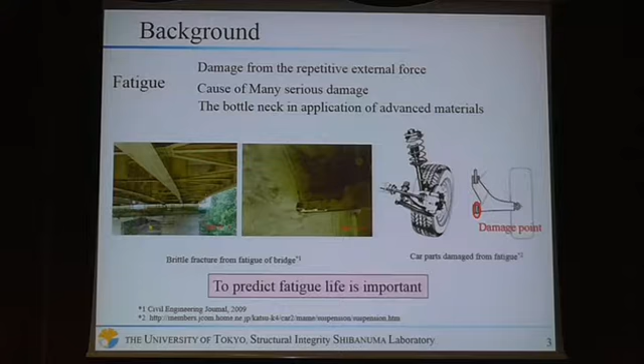Fatigue is damage from repeated stress. Many serious failures are related to fatigue. Fatigue can also be a bottleneck in application of advanced materials. So, predicting fatigue life is important.

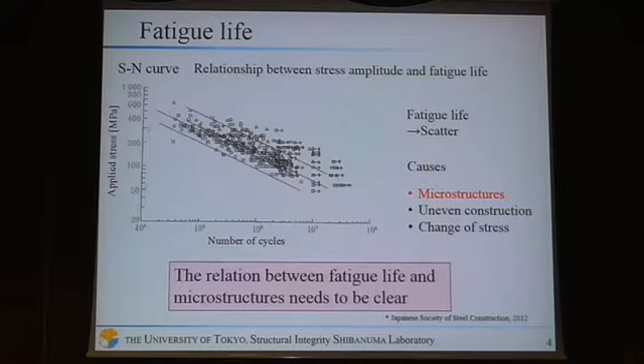Fatigue life is expressed in SN curves, which show the relationship between stress amplitude and fatigue life. It is known that there is a scatter in fatigue life. This is said to be caused by microstructures, uneven construction, or changes in stress. So the relationship between fatigue life and microstructures needs to be made clear.

The objective of this study is the development of a fatigue life prediction model considering the quantitative effect of microstructures in ferrite pearlite steel. Ferrite pearlite steel is the most popular steel for practical use.

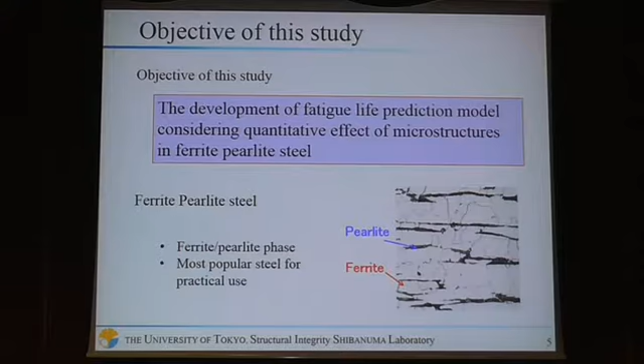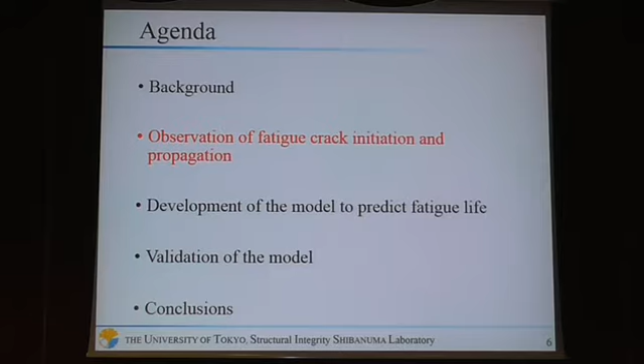In the fatigue test, this specimen is used. This specimen has a notch in the center, and the place where a crack can initiate is limited by this notch. The test condition is shown in this table.

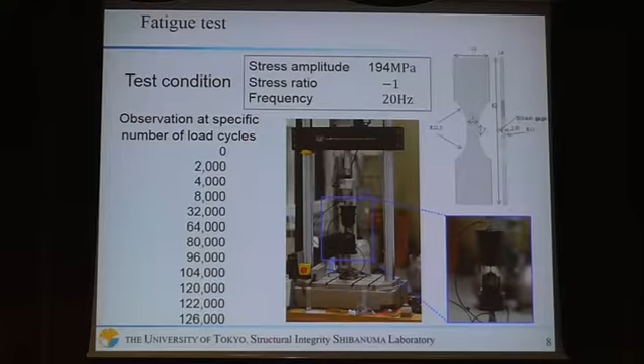We observed at a specific number of load cycles. By comparing pictures of the same place, we can see how the crack propagates.

This is the crack behavior. By turning back through these pictures, we can see the crack initiation site. The crack initiates when the number of load cycles reaches 4,000 times.

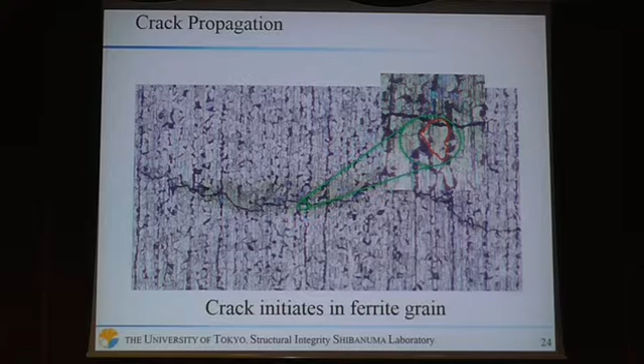By comparing this picture with the picture after etching, we can see the crack initiates in a ferrite grain. Next, the development of a model to predict fatigue life.

This study is based on a theory, a model for propagation of small fatigue cracks interacting with grain boundaries. This theory needs 4 input parameters to calculate the fatigue crack.

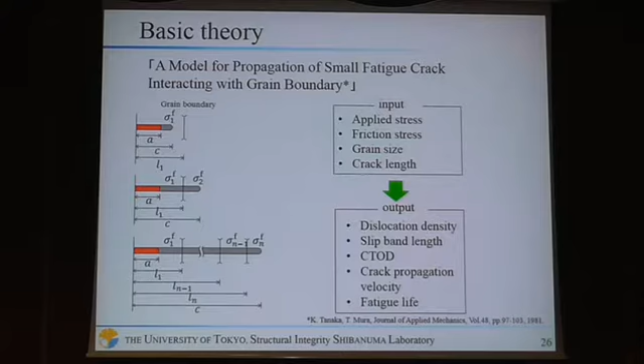CTOD value is calculated from this formulation, and crack propagation velocity is calculated from this formulation.

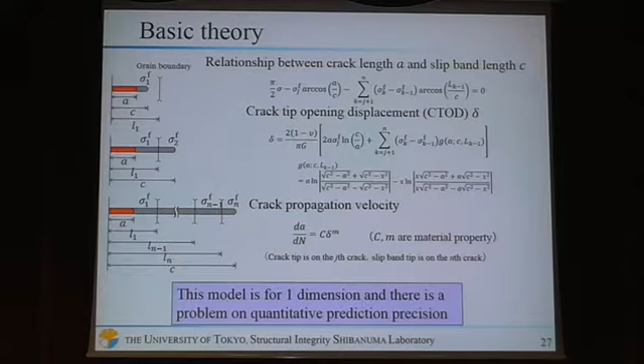However, this model is one-dimensional, and there is a problem with quantitative prediction precision. So we extended it to 3 dimensions.

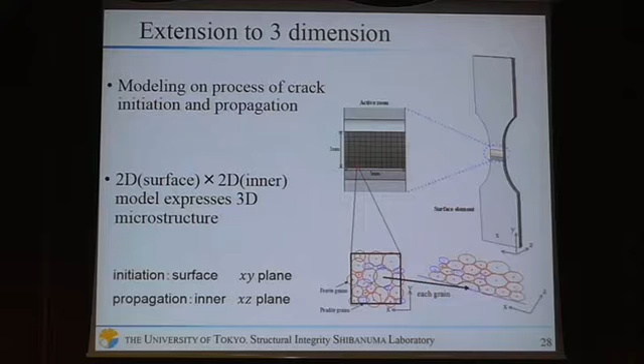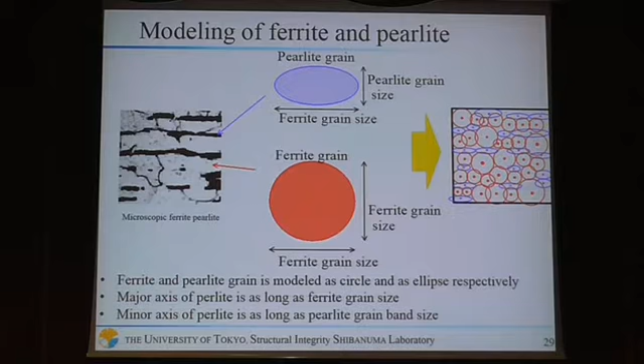In modeling the ferrite pearlite grain, this model regards the ferrite grain as a circle and the pearlite grain as an ellipse, based on a preceding study.

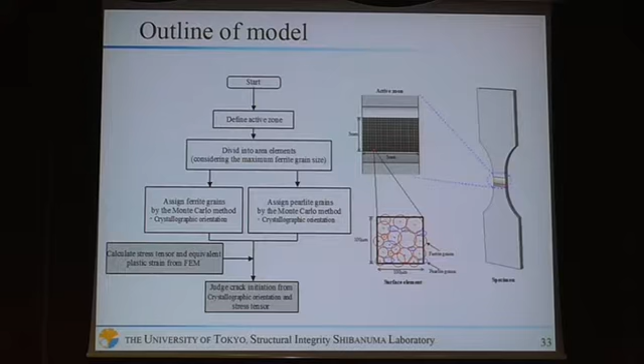After crack initiation, this model considers crack propagation. First, grains are filled using the Monte Carlo method.

Next, these grains are transformed into grain rows. By this process, this model can regard the two-dimensional arrangement of grains as one-dimensional.

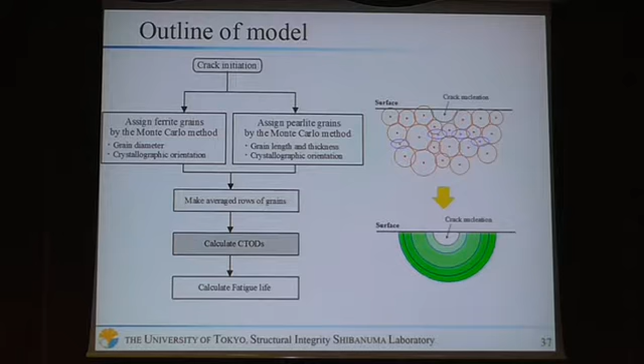Next, this model calculates CTODs and calculates fatigue life. Calculations for all grains are conducted, and the minimum is taken as the fatigue life.

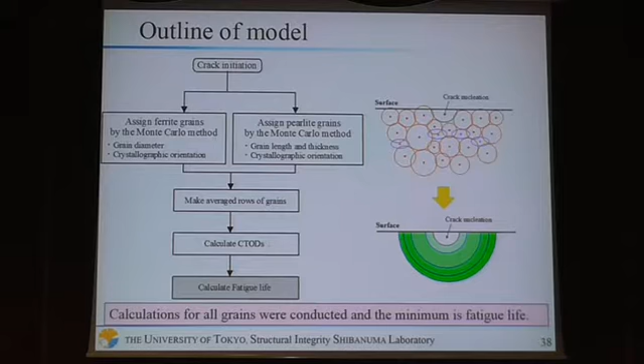Next, I'll talk about this grain arrangement in more detail.

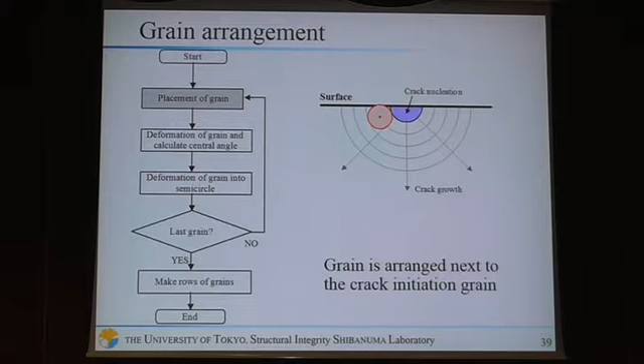First, grains next to the crack initiation grain are considered. Each grain is transformed into a sector which has the same area, and the central angle is calculated.

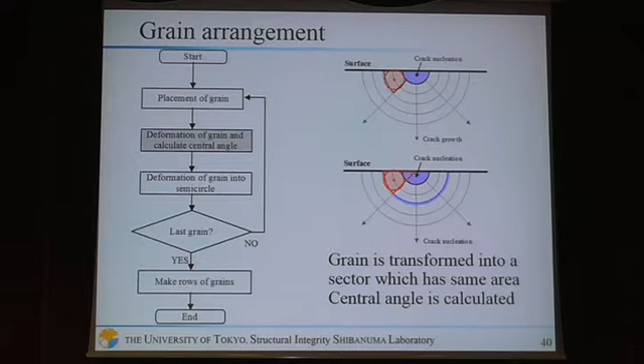Next, the grain is transformed into a semicircle. Next, the grain is arranged next to the semicircle. This process is repeated until all grains are arranged.

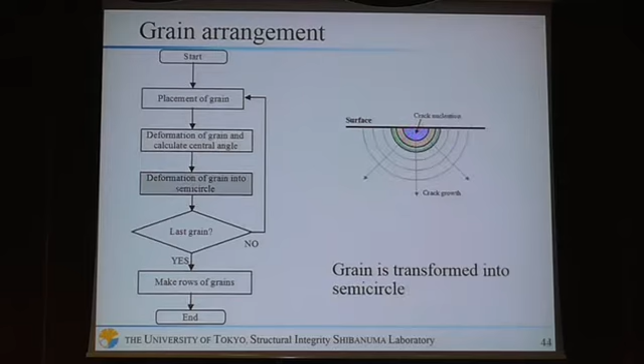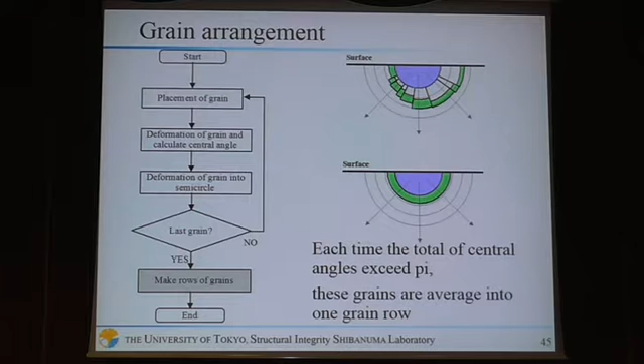So each time the total of central angles exceeds pi, these grains are averaged into one grain row. Next, validation of the model.

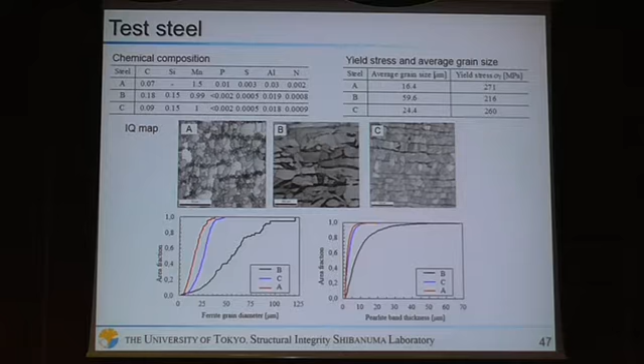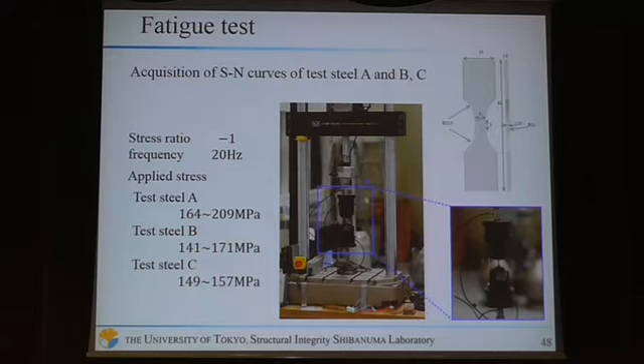In the fatigue test, we used these test steels. For model validation, we conducted a fatigue test under this condition.

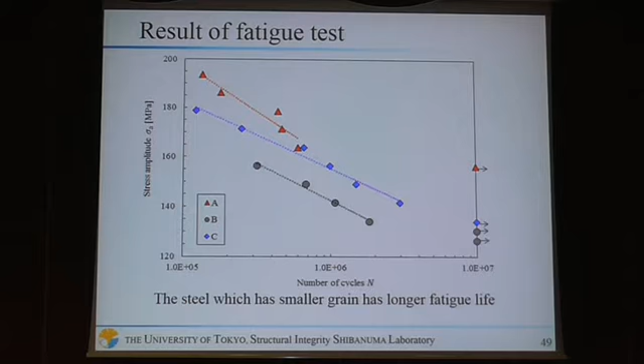This is the result of the fatigue test. The steel which has a smaller grain has a longer fatigue life.

The friction stress in this model is defined as the yield stress of an infinite-sized single crystal. The Hall-Petch relation and ratio of hardness are used to calculate this friction stress.

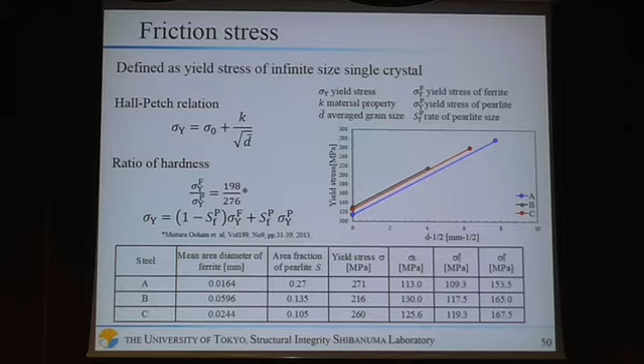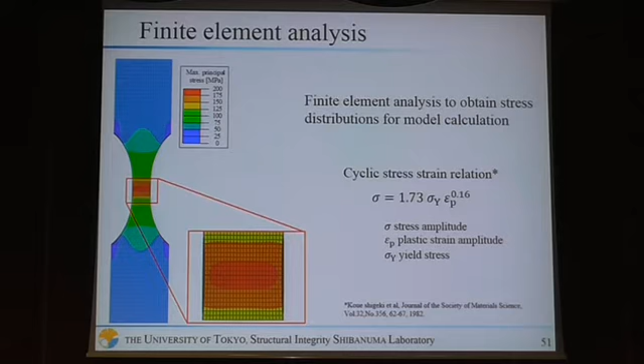FEM finite element analysis is conducted to obtain the stress distribution for modification. In the FEM, the cyclic stress-strain relationship is used.

The parameter of propagation velocity is calculated by model calculation of test steel B. This is the value of C and m.

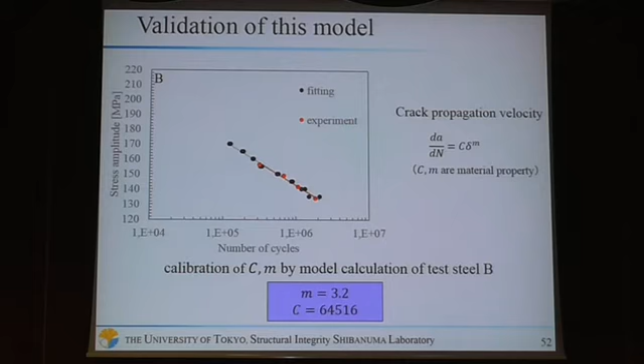Using this C and m value, we conducted model calculation of test steels A and C. Both predictions agree with the experimental results with high accuracy.